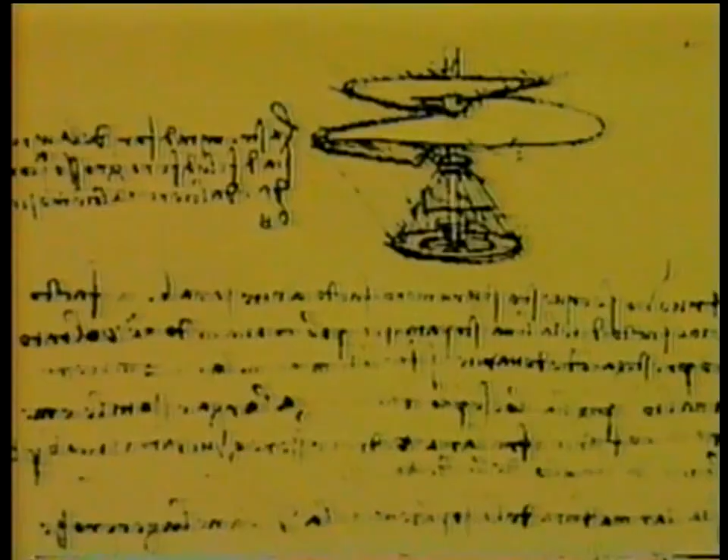In the 15th century, in his now famous drawing of the lifting air screw, Leonardo da Vinci wrote, 'I find that if this instrument with a screw be well made and be turned swiftly, the said screw will make it spiral in the air and it will raise high.' This was the world's first proposal for a full-size rotary wing device.

In the following centuries, several model helicopters were built and flown, but none to any degree of real success. But in 1784, flying mechanical models made by the Frenchman Launoy proved rotary wing flight was possible.

In the late 1800s, on the other side of the aviation fence were the fixed-wing pioneers, who were also having their share of trials and tribulations. It seemed like everyone shared the same degree of success in their early attempts to free themselves from gravity.

But man, in his steadfast persistence, finally did manage to get his fixed-wing machines off the ground. The helicopter pioneers, on the other hand, had a very, very long way to go.

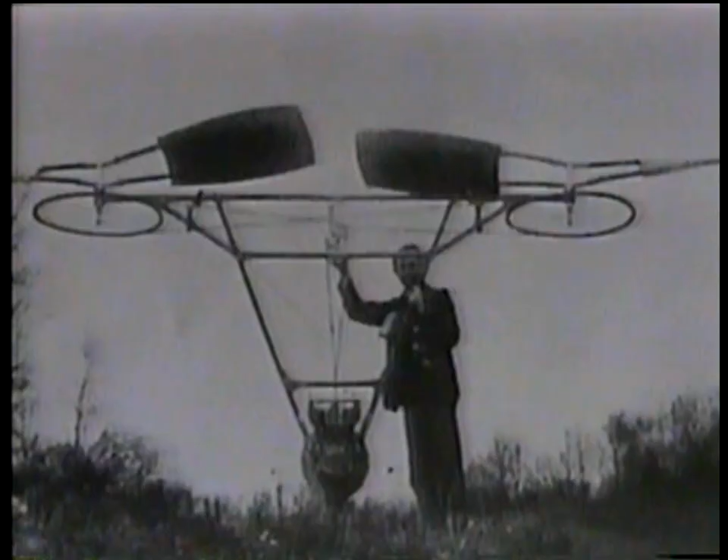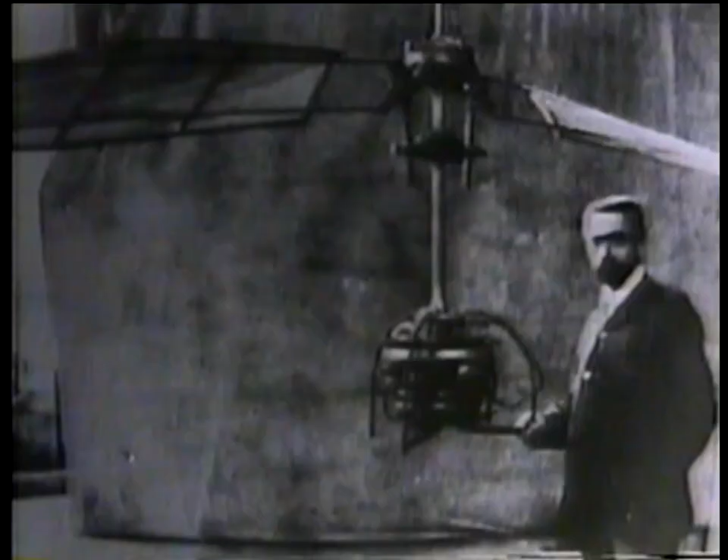As the 20th century began, technology had progressed far enough to supply the inventors with power plants capable of producing some lift. Unfortunately, though, not enough to lift the weight of their machines. It seemed the only thing holding back the development of the helicopter was the lack of a suitable engine.

But when suitable engines had been produced, these aviators soon realized that an engine was only one of a multitude of problems they would have to overcome. In the decades to follow, each one of these problems had to be identified and resolved by countless engineers throughout the world.

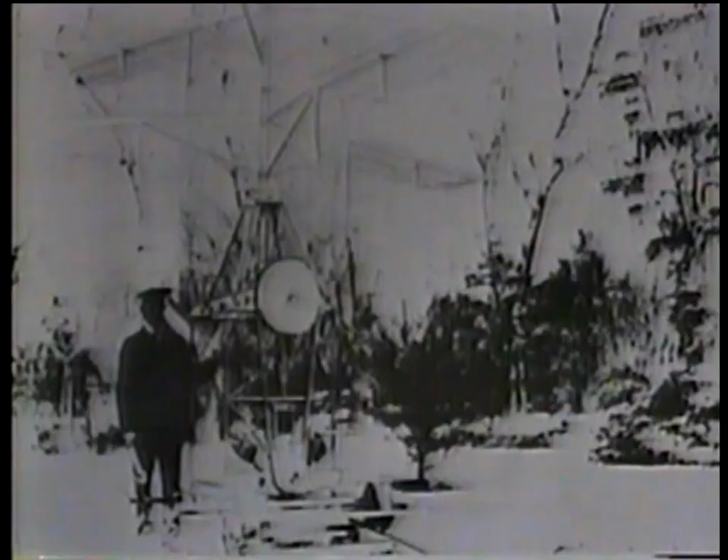In 1907, the history of the helicopter really began with the first free flight of Cornu's helicopter. Igor Sikorsky followed, along with numerous others, most managing to get off the ground with little or no control once they were airborne.

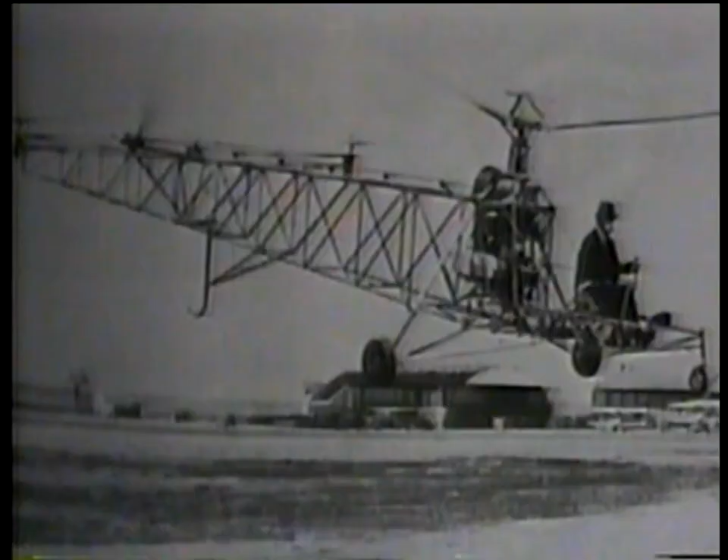The year 1940 saw Igor Sikorsky make great strides in controllable direct lift flight. In that year, he set a world endurance record of 1 hour and 32 minutes.

In the United States, World War II brought intense government interest in the helicopter. Government funding and military contracts followed. This was the real birth of the helicopter industry in the United States.

By the end of World War II, with a complete shutdown on helicopter research in the USSR, Great Britain, and France, and with the annihilation of German industry, the United States found itself the leader in helicopter research and production.

The 1950s brought the Korean War and a new role for the helicopter, providing medical transport to MASH units. By the late 50s, a powerful new breed of

helicopters was born that sparked a revolution. Jet engines weighing one-half that of their piston-powered forerunners produced even more horsepower and were small enough to mount on top of the helicopter, making for a roomier cabin.

The 60s and 70s saw the most dramatic improvements in safety, dependability, and efficiency. Proven in the Vietnam War, the quality of the helicopter rose to astounding heights. Unfortunately, so did the cost of these machines, not to mention the cost of maintaining them.

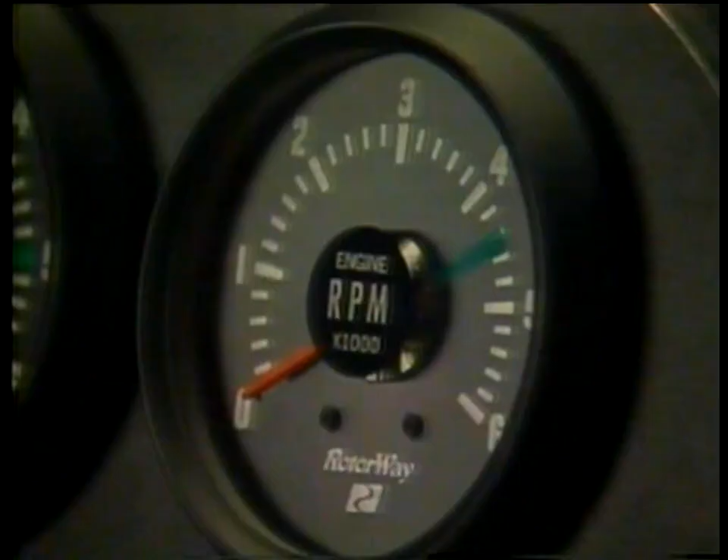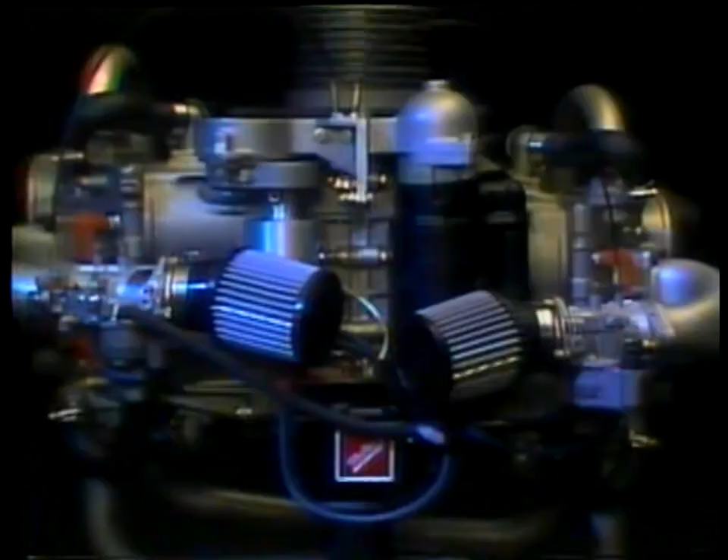The RotorWay Exec, the only helicopter designed and conceived for the private individual as personal transportation. It seats two, cruises at 95 miles per hour with a maximum airspeed of 115, and has a range of 200 miles. Its power plant, the RW152, is water-cooled, 4-stroke, 4-cylinder, 152 horsepower, produced entirely by RotorWay. With asymmetrical airfoil rotor blades and state-of-the-art elastomeric rotor hub technology, it's a ship that rivals any in its class at a fraction of the cost. It's something you've got to experience for yourself.

Sure, it's pretty, but how well does it fly?

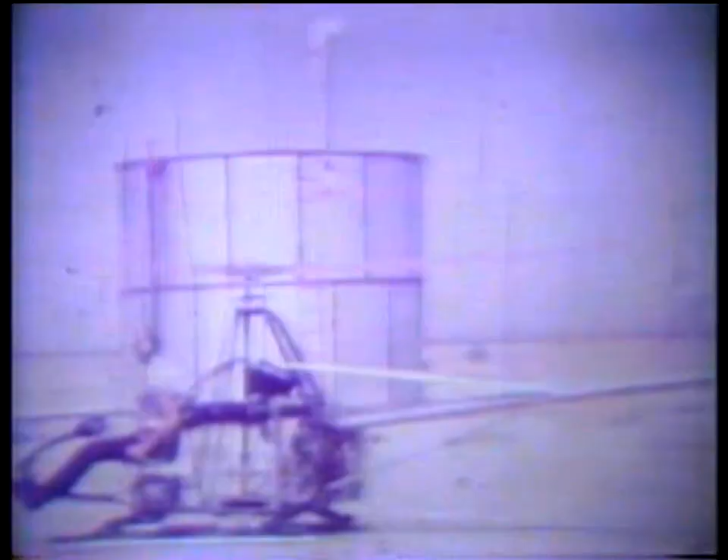But it wasn't easy. The evolutionary path to the present-day Exec was a very hard and long journey. In the beginning, 7 different prototypes were tested, but only 3 ever saw production. During the first 10 years of development, not one piece of hardware was sold. Finally, in 1967, the first magazine ads appeared announcing the availability of the Javelin, a one-man helicopter that could be assembled in a reasonable length of time by a home builder.

To make a long story short, RotorWay never stopped growing or improving its designs, from the Javelin to the Scorpion, powered by a 2-cycle, 4-cylinder, inline Mercury outboard engine. The Scorpion Too, RotorWay's first 2-seat helicopter, utilizing a 125-horsepower Evinrude V4 for its power plant.

The Scorpion 133. From the beginning, 10 different power plants were tested in RotorWay prototypes. Then, in 1975, RotorWay began production of its own power plant, the first generation of the RW133.

And finally, on to the Exec, RotorWay's latest offering. The Exec isn't just a new face and an old design. It's powered by yet another engine development, the 5th generation of improvements, the RW152. Increased from 133 to 152 cubic inches, along with improvements on cranks, rods, cases, cylinder heads, water jackets, and pistons, just to name a few. There's a new ignition system and rotor system, and most obvious, a clean corporate aerodynamic design.

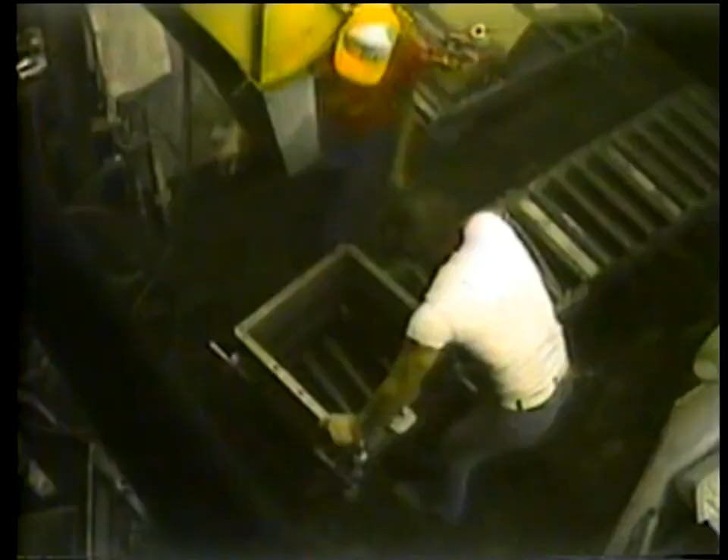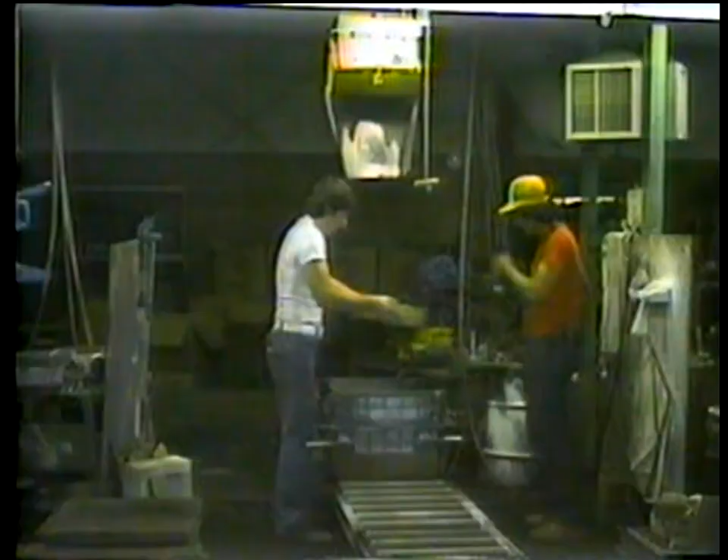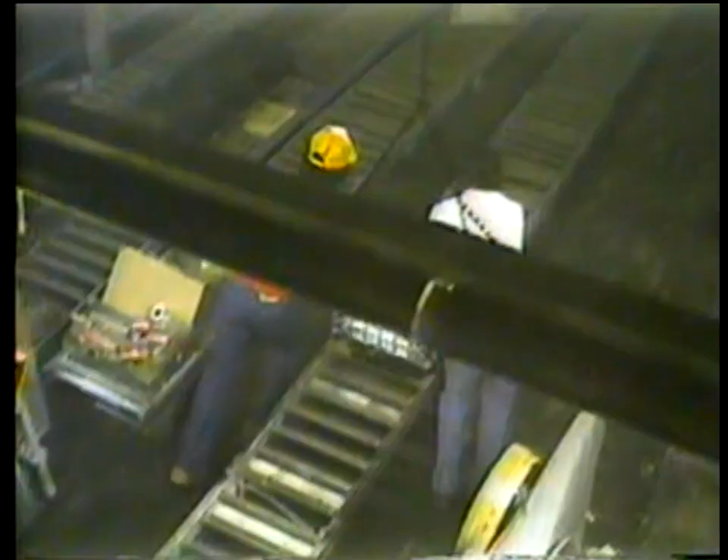Here we see a crankcase for the RW152, the Exec's power plant, being made. First, the pattern is filled with sand from the overhead hopper. It's rammed tight against the mold, then separated from the mold with a pneumatic vibrator. Now the mold is ready to be poured off. Aluminum is melted down in the electric induction furnace. When the metal, in this case aluminum, has reached 1100 degrees, it's ready to be poured into the mold.

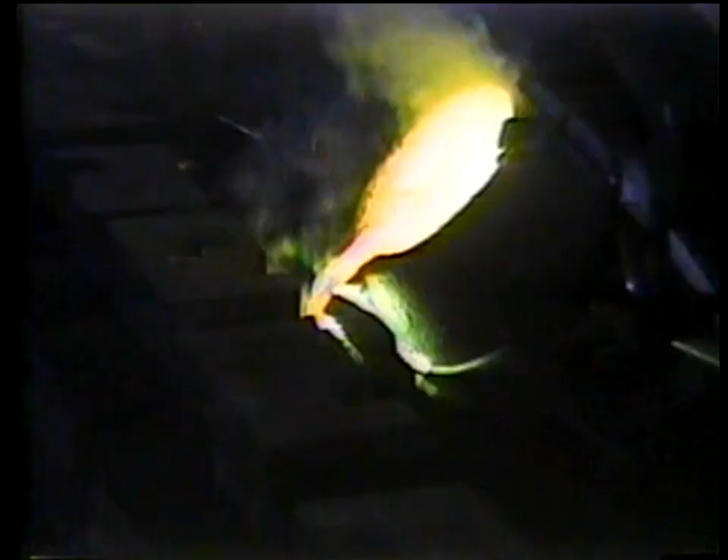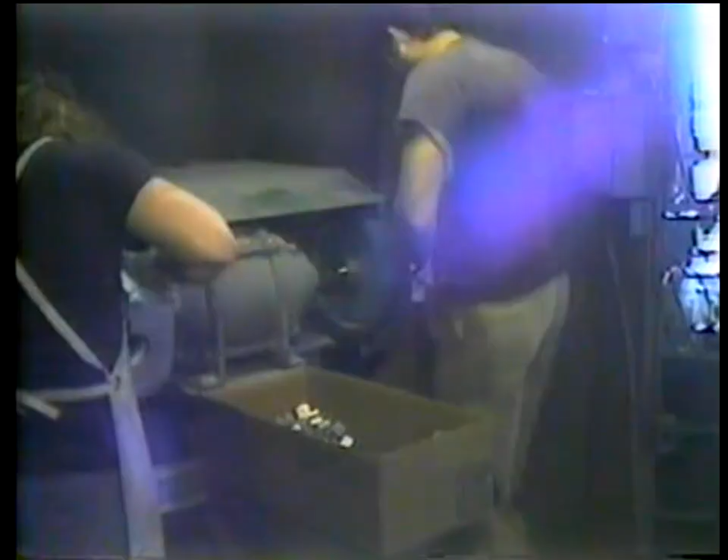Once the mold and metal have cooled, it's shaken out. Gates and risers are cut off, and then the castings are hand-tooled on belt sanders or hand grinders to achieve the final detail necessary.

The rest of the shops you'll see in RotorWay's complex handle only RotorWay's parts alone. The next step on our tour is the machine shop. This is where most of the parts for the RW152 power plant and most other helicopter components are manufactured.

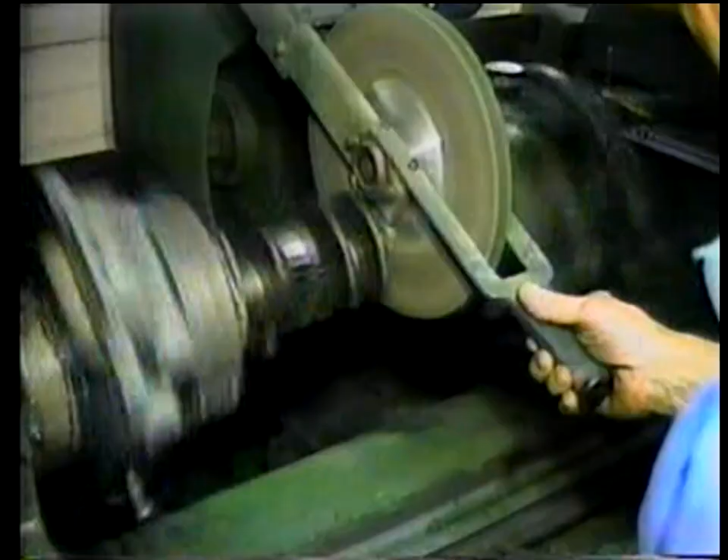Here in the grinding area, work is performed on the crankshafts. There are a total of 6 grinders in this area, and these machines can hold tolerances into millionths of an inch.

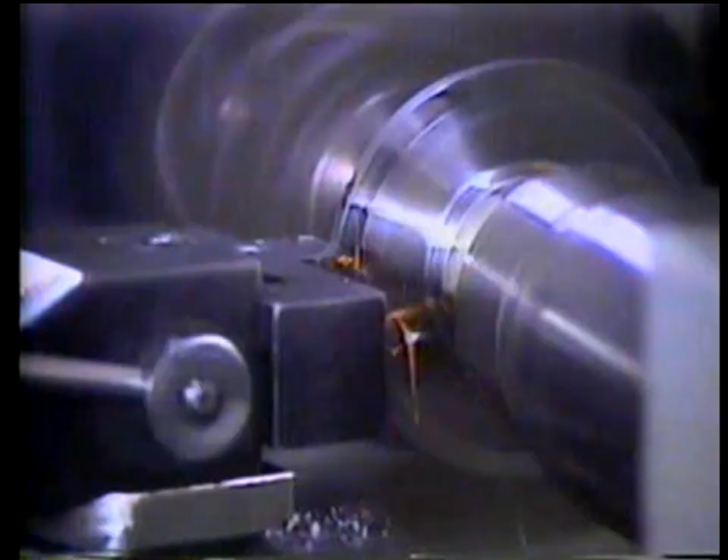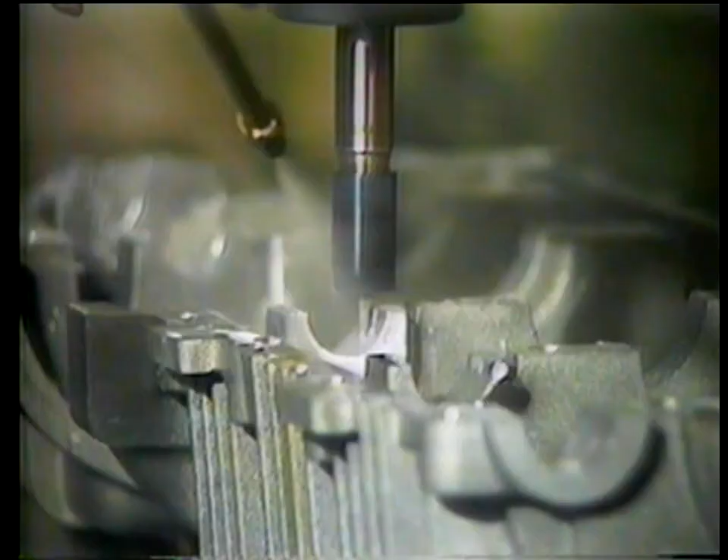In the secondary machining area are lathes, mills, honing, and line boring machines. Here, oil passages are drilled into crankshafts and machining is done on the main rotor hub plates along with several other operations.

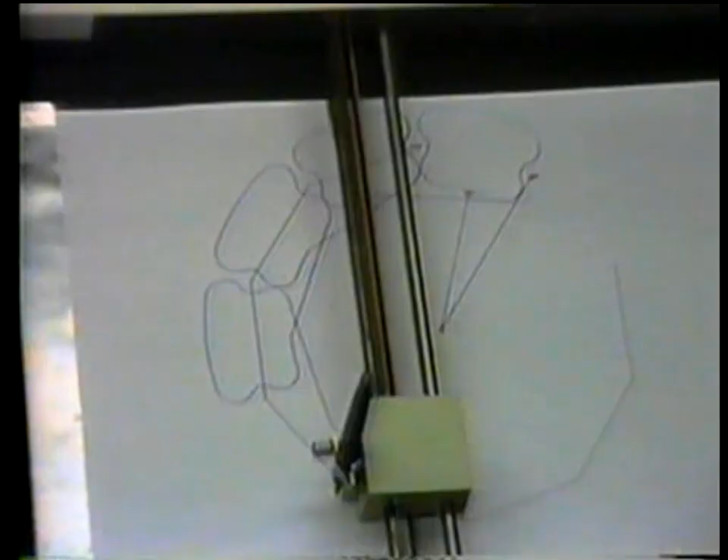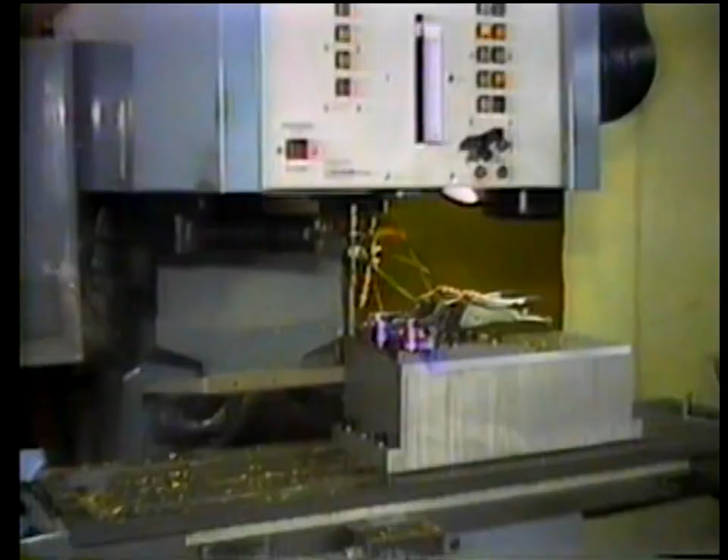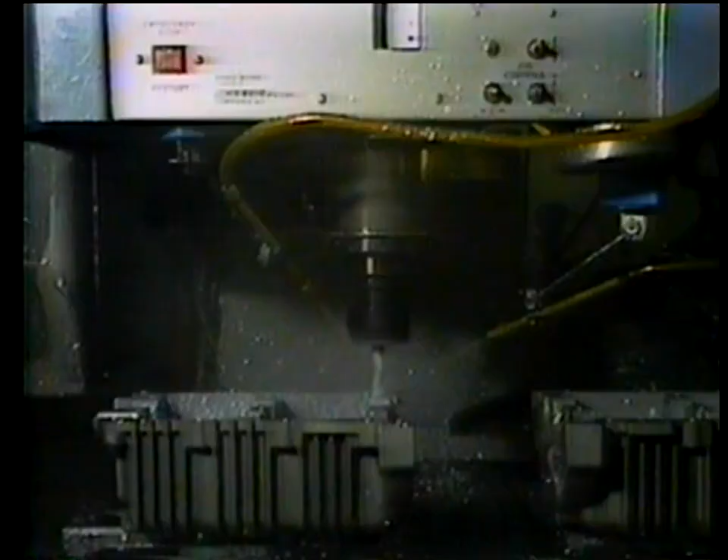The tool path programming for both the tape lathes and mill is done by an operator at a separate computer-assisted design terminal that you see here.

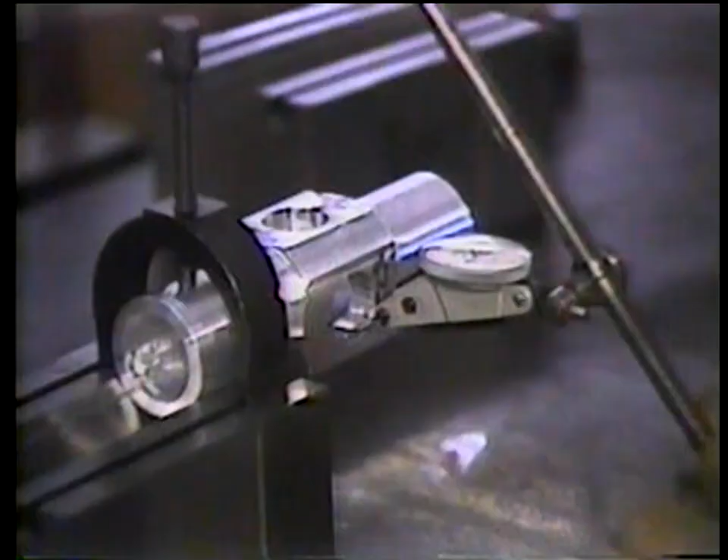Quality control is the single most important role with any aerospace manufacturer. In the 18 years RotorWay has been producing aircraft, the philosophy has been to produce a quality product. The key to RotorWay's success lies in the quality control exercised throughout the product's fabrication. Employing some of the most recent inspection equipment on the market, the inspection area checks each and every part manufactured on the latest state-of-the-art 3-axis computer-controlled measuring equipment.

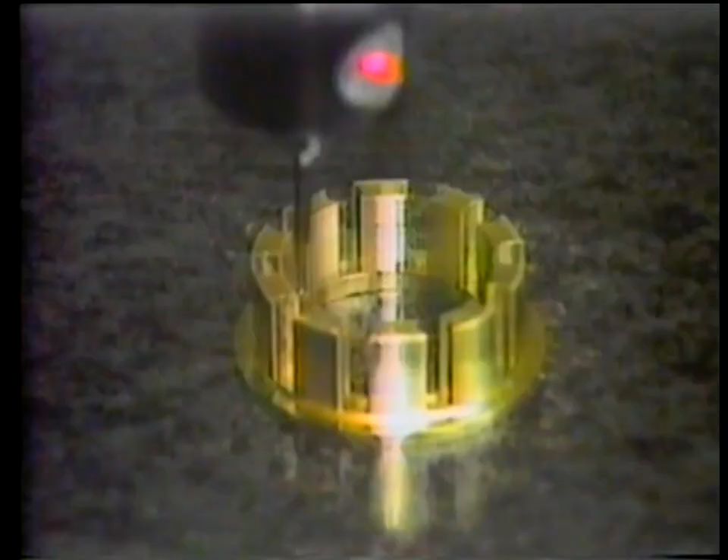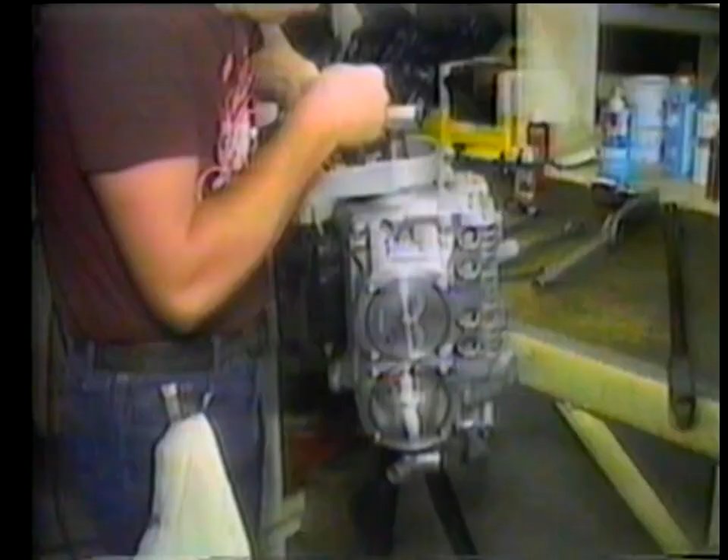The engine shop is where the RW152 power plants are assembled by hand. The castings and parts assembled here were poured at the foundry, machined in the machine shop, and have passed through dozens of quality control tests. Now let's take a very fast look at the Exec's power plant, the RW152, being assembled.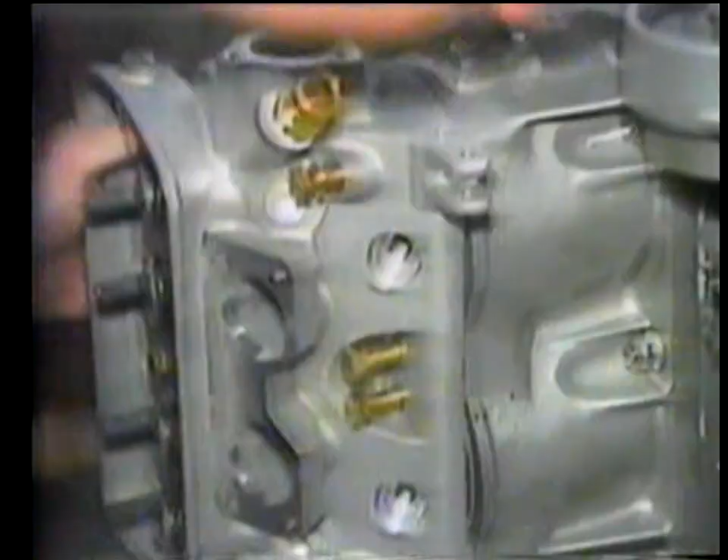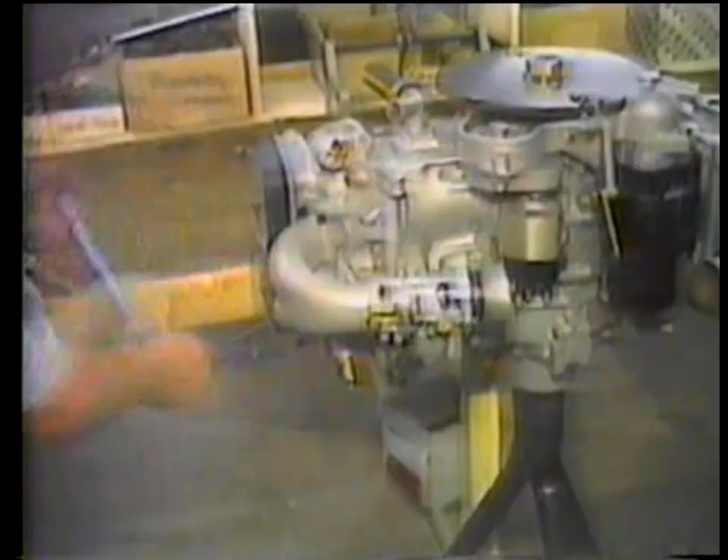If you can work this fast, there'll always be a place for you here at RotorWay.

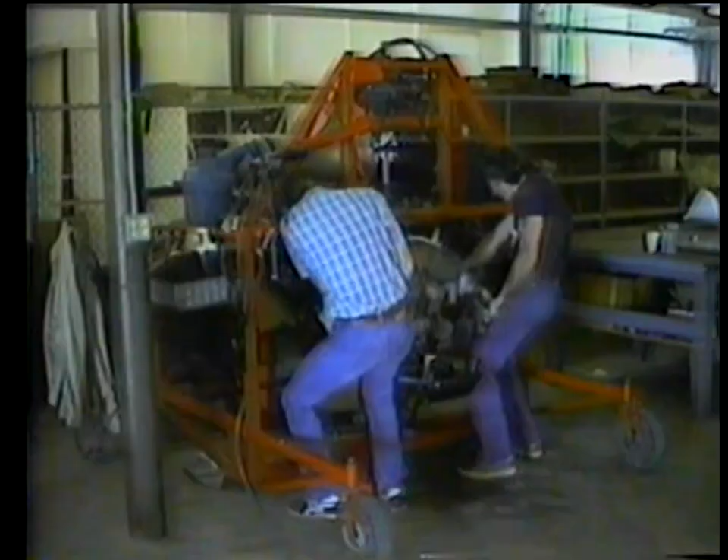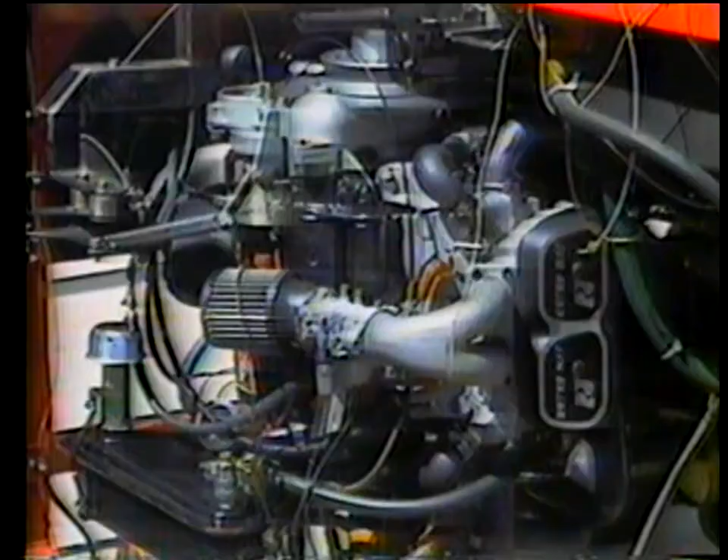After final assembly is completed on the RW152, an operational test is performed on every engine. This test involves using a specially designed dyno test cell, which can simulate actual load conditions which will be experienced by the engine during normal operation when placed in the Exec helicopter.

Once placed in the dyno test cell, the engine is started and run up for the first time. Close attention is directed toward achieving proper engine torque, horsepower, and temperature stabilization. RotorWay also adjusts the carburetors, sets the timing, and calibrates the fuel flow.

When you receive your engine, you and RotorWay know it meets all specifications. By going the extra mile required to put out an engine that has been tested and blueprinted, RotorWay is able to ensure high quality and reliability of operation.

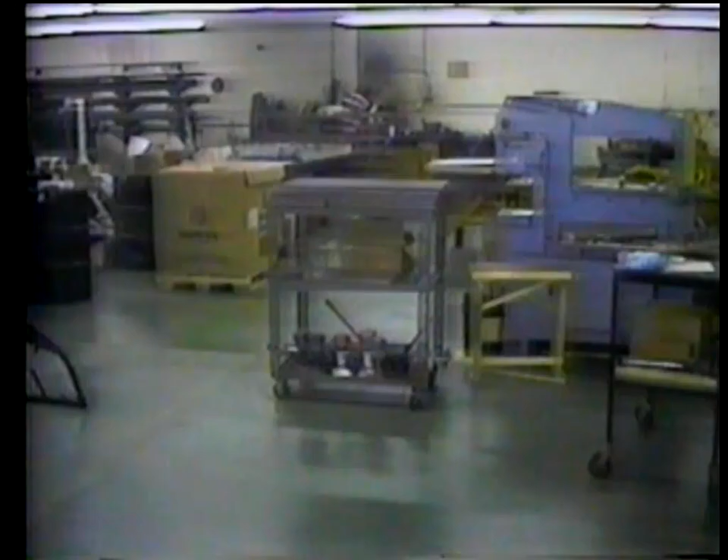The next area we'll look into is the steel fabrication shop. This is where the airframes for the RotorWay helicopters are made. There are a number of operations being performed here, including the cutting, coping, bending, and scribing of the airframe tubing prior to being placed into the airframe jigs for welding.

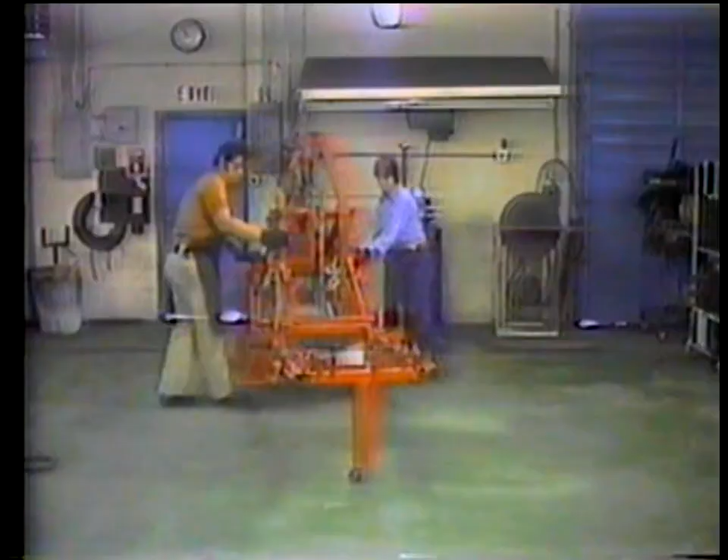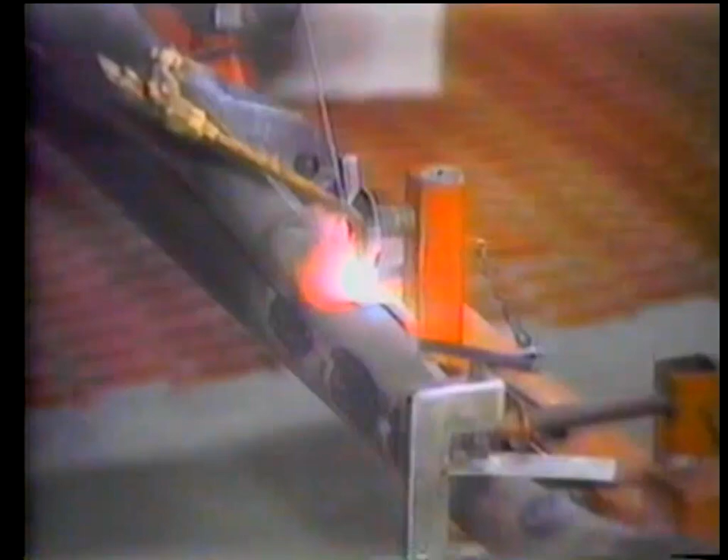A jig is used to ensure precise alignment of tubing on all airframes prior to welding. RotorWay uses only the finest grade 4130 chromoly steel for its airframes, chosen for its high strength, low weight characteristics. An oxygen acetylene torch with filler rod is used to weld the tubing together.

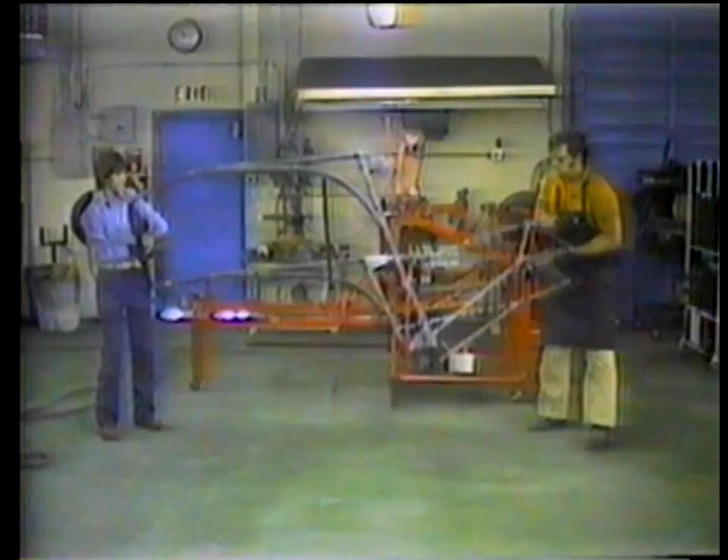You can now begin to see the Exec's roll cage design, which adds a great degree of structural integrity to the ship. After each piece of tubing has been tacked or welded into place, the alignment is double-checked, and then the frame is ready for shipment.

The next area we'll look at is the fiberglass shop. RotorWay's fiberglass shop, just like all the other shops, is totally self-contained. RotorWay starts by building its own plugs and molds for the parts that are being made. The fiberglass process starts with spraying gel coat into the wax surface of the mold.

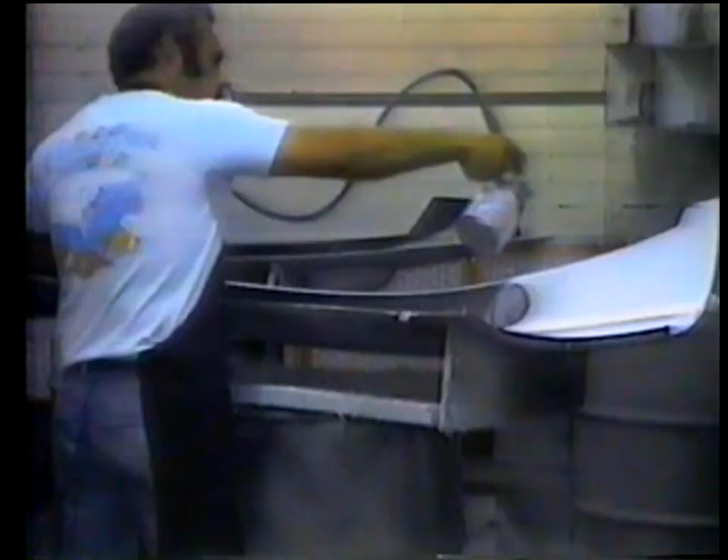The hand layup process is used exclusively for RotorWay products since they must be as light and as strong as possible for aircraft application. First, a layer of mat and cloth is pre-cut to a special pre-sized template, then saturated with resin. The saturated mat is then laid directly into the mold.

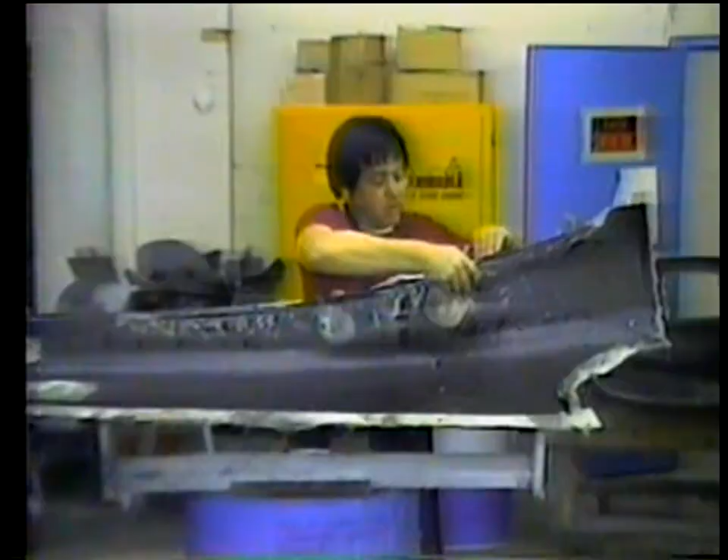RotorWay utilizes the squeegee method, whereas the mat and cloth are squeegeed out by hand. Using the squeegee process removes the maximum amount of resin from the parts, making it as light as possible, yet assures the saturation of the material, ensuring maximum strength. The part is trimmed and, after curing, is then removed from the mold.

The RotorWay Exec is certificated by the Federal Aviation Administration under the amateur-built category as experimental. This means the ship is assembled by you, the owner. The builder applies for his own airworthiness certificate upon completion of his aircraft. This is a very simple, straightforward process.

If you're not familiar with custom or amateur-built aircraft, at first glance you may be tempted to dismiss the idea of building your own helicopter. Don't be in a rush to reject this unique approach. There are several reasons why this approach to aircraft ownership makes good common sense.

If we were to sell this helicopter assembled, it would cost between $80,000 and $90,000 - well over 3 times what RotorWay presently sells it for in kit form. It'll take approximately 1 year part-time, evenings and some weekends, to build. But you'll be saving yourself around $60,000 by doing it yourself. How many people have a $60,000 a year part-time job?

If you build it yourself, you are allowed to do the maintenance, saving you even more money. Certified A&P mechanics cost $35 to $40 an hour. If you own a factory-assembled aircraft, you'll have to pay a mechanic to inspect and work on it for you.

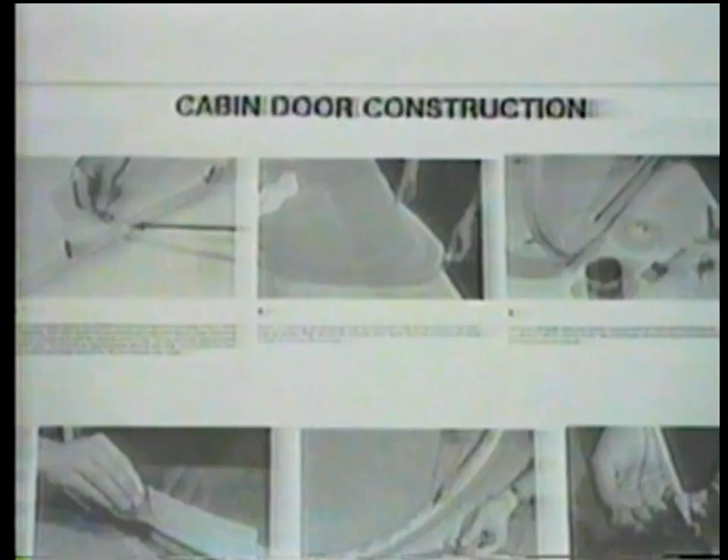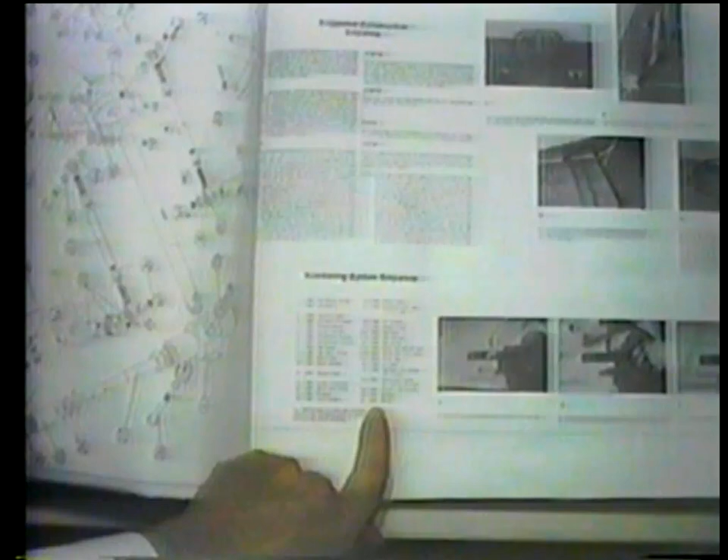RotorWay has left no stone unturned in its efforts to assist its builders. The RotorWay construction plans are some of the most well laid out plans in the home-built market. They include a series of 500 see-do pictures. Each photo has a caption below which gives instructions concerning the activity to be performed in that particular photo. In addition, if any dimensions are needed, you're referred to a zone on a print which will give those dimensions.

In addition to the detailed construction plans, RotorWay also has a customer service department. If you have a question during the building process, you can call the factory and talk to one of our customer service representatives.

RotorWay also has an extensive network of agents and builder clubs that can help you with questions and provide helpful hints and building techniques that will save you hours of building time.

RotorWay assembles a lot of the more difficult components, such as the engine, secondary drive, tail rotor assembly, and elastomeric rotor hub. In short, a great deal of the more complicated components are already completed for you.

Now let's take a quick look at a ship being final assembled. What you'll be seeing is final assembly. There is additional prefabrication work that must be done prior to final assembling your helicopter.

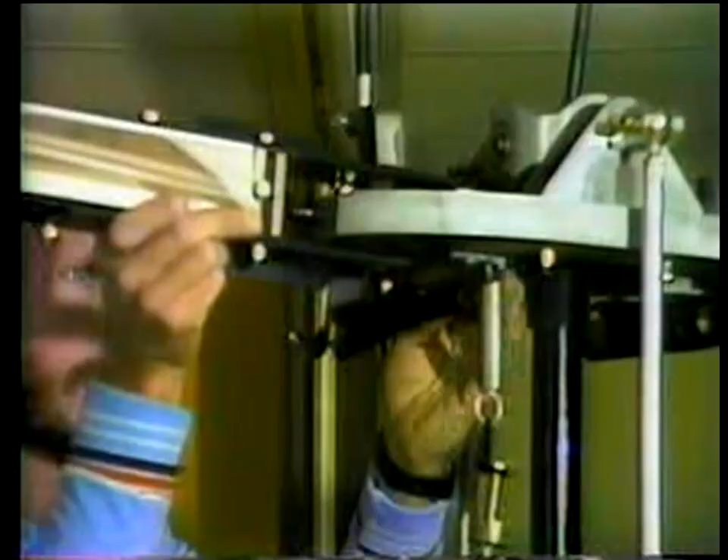When your ship is completed, you still won't be quite ready to fly. There will be a lot of pre-flight checks, rigging, and adjustments to make on the rotor system and flight controls. After these final adjustments are made, you'll be ready to run up your helicopter for the first time. And that day will finally arrive when you're ready to climb out in your helicopter. Once your ship is completed, you'll return to the RotorWay Sky Center for your flight training.

After your orientation meeting, you'll begin a concentrated week of instruction. You'll learn helicopter aerodynamics, theory, maintenance, rigging, and begin basic hovering techniques.

Flying a helicopter isn't as easy as it looks. It takes a lot of practice just to do the simple maneuvers you'll see here. To give you a basic understanding of how a helicopter flies, we'll have one of the Sky Center personnel explain the controls, how they work, and what effect they have on the ship in flight.

There are four basic controls in the helicopter: the cyclic, the collective, the throttle, and the anti-torque pedals. The cyclic controls the tilt of the main rotor disc. As you increase cyclic forward, you tilt the disc forward. As you bring cyclic aft or rearwards, you tilt the disc to the aft. When you tilt the disc to the left, you apply left cyclic. To tilt the disc to the right, you apply right cyclic.

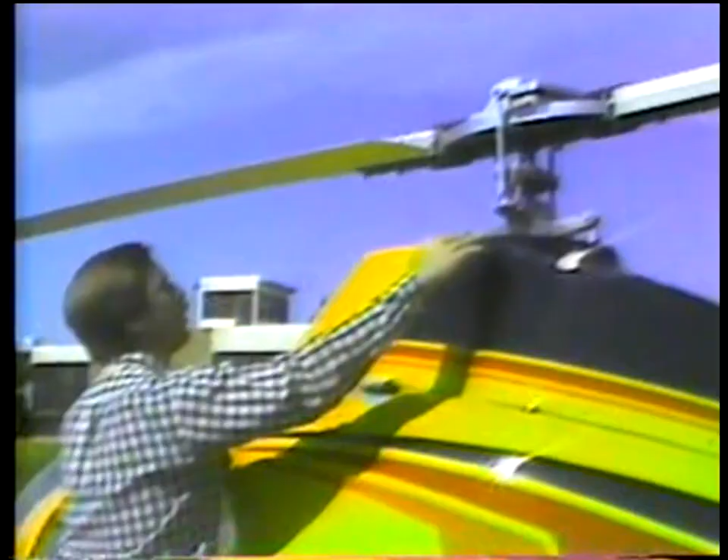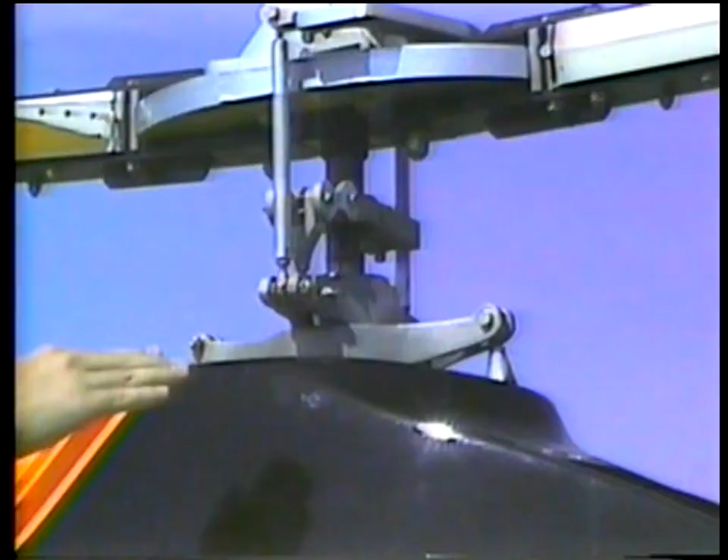Let's take a moment and look at the flight controls on our rotor system. Forward cyclic tilts the swash plate forward. Aft cyclic tilts the swash plate to the aft. Lateral to the left and lateral to the right. Now we come back to a centered cyclic.

Our next control is the collective. The collective controls the pitch in the main rotor blade and is used to increase or decrease the amount of thrust coming out of the main rotor system. As we increase collective, we increase the pitch in the blades. As we decrease collective, we decrease the pitch in the blades.

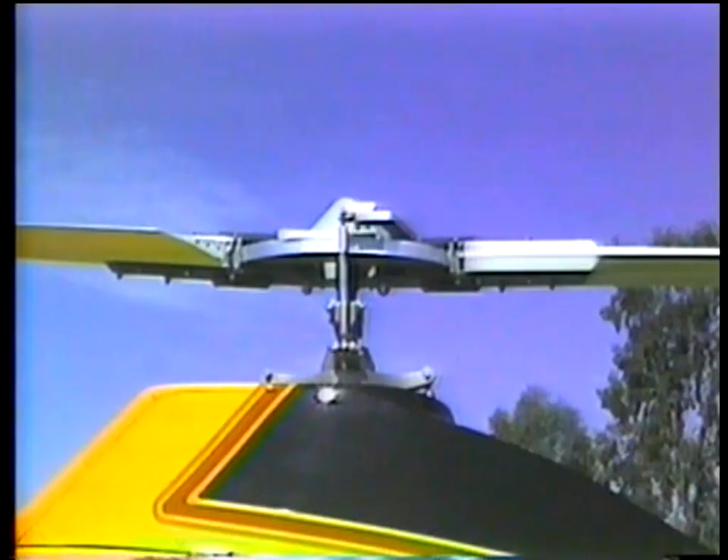Let's now look at how the collective functions on the main rotor hub. As we increase pitch, the swash plate moves up, increasing pitch in the blades. As we decrease pitch, the swash plate moves down, decreasing the pitch in the main rotor blades.

Our next control is the throttle, which is located on the end of the collective. It is normally operated with the left hand, and to increase throttle, you simply roll the throttle on. To decrease throttle, you roll the throttle off. Throttle is required when you increase and decrease the collective pitch in the main rotor system. The throttle controls are connected to the carburetor and increase and decrease the throttle opening on the carburetor.

Our last control is the anti-torque or tail rotor control pedals. These pedals are used to control the heading of the aircraft and to resist the torque that's put into the main rotor system from the engine. As you increase right pedal on our aircraft, we increase the pitch in the tail rotor blades. As we decrease the right pedal or increase the left pedal, we decrease the pitch to neutral and then actually add pitch in the other direction.

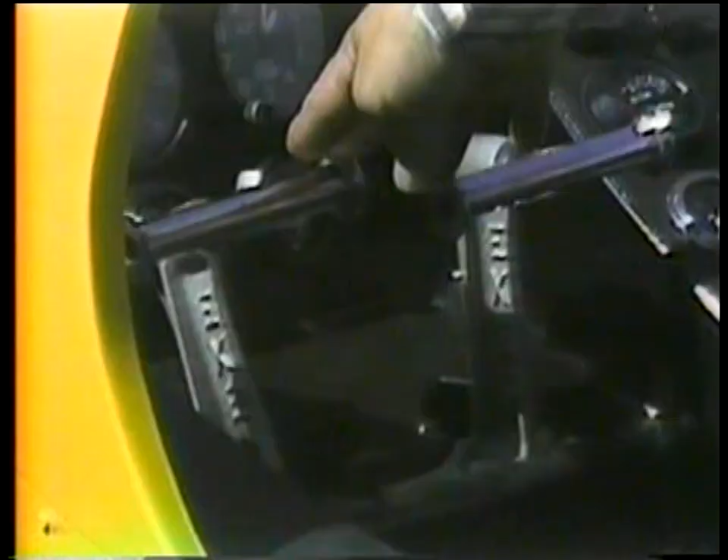As we bring the pedals back to the neutral position, let's look at the tail rotor and see the reaction there. Starting with a neutral pedal, we will increase pitch in the tail rotor blades with full right pedal. At full right pedal, now we come back in with full left pedal, and you can actually see the reverse angle on the blades. Now we'll come back again to our neutral position.

Now, as I move the helicopter controls, we'll have a demonstration of their effect on a flying helicopter. Let's watch a helicopter in flight as I move the controls in the same relationship in this split-screen demonstration.

As we come to the point where we're ready to lift off, we begin by increasing collective until we come up into a hover, and we find that we're in a stabilized hover. Now forward cyclic to move from one pad to the other. Forward cyclic is reduced a little bit to neutral, and then aft to stop the movement. Now we come aft some more to actually back up from one pad to the other. Neutral, slight forward cyclic to stop the motion, and come back again to a neutral cyclic and a stable hover.

Now we perform a left hovering turn by increasing pedal to the left. Now right cyclic and right pedal so that we hover sideways to the right, back to a neutral position with both controls, stable hover, and now left cyclic and left pedal for flight to the left. Coming across, we begin to neutralize our controls so that we slow down and come back into a stationary hover.

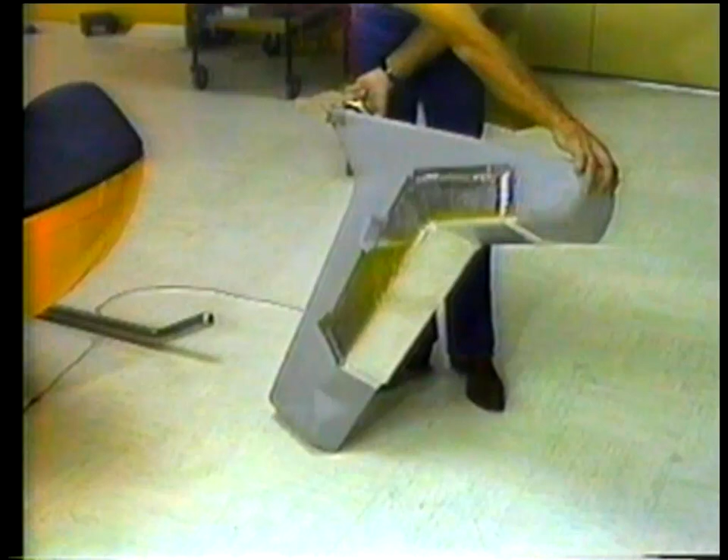The airframe employs a roll cage design that protects the passenger compartment. Then, in order to reduce the risk of post-crash fire, the Exec uses a special high-impact resistant fuel tank material produced by Phillips Petroleum.

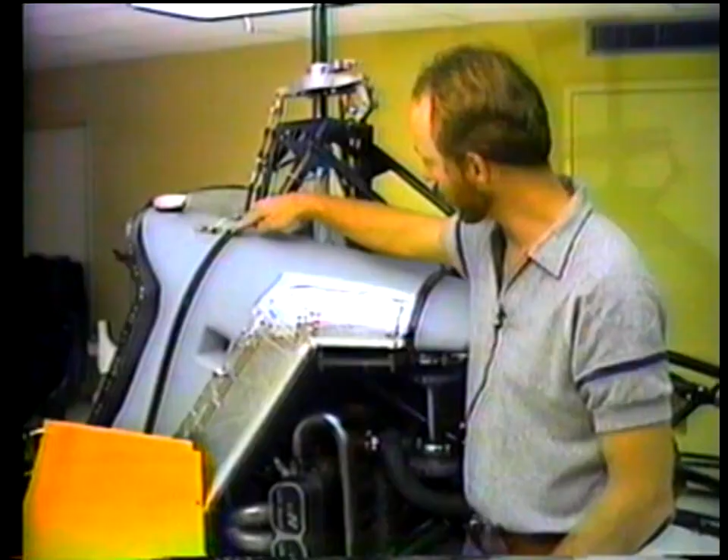These tanks are rotationally molded from a cross-linked high-density polyethylene resin. It's far superior to metal for several reasons, but primarily because of impact strength.

Using the Exec's external sling, we'll demonstrate the strength of the fuel cell. First, we fill the tank with gasoline and then attach it to the sling. Now we'll take it to an altitude of 30 feet for the drop test.

As you can see, the fuel tank easily survives the impact. When you consider the fact that post-crash fire danger is a major cause of fatalities in aircraft accidents, having a fuel tank that resists punctures and impact breakage better than metal is a major safety feature.

One of the most commonly asked questions concerning helicopters is what happens when you're in flight and the engine quits. First of all, you need to realize that it's not the engine that's keeping the helicopter in the air, it's the rotor blades. If you're driving your car down the road at 55 miles per hour and the engine quits, you'll coast for a while, then come to a gradual stop.

The reason is because of the inertia the car has built up. The inertia of forward speed keeps the car moving. Now, the same thing happens with the helicopter's rotor blades. They will keep turning after the engine quits and get you safely to the ground while freewheeling. This maneuver is called auto-rotation.

They are only found on larger commercial ships. In the cross-section shown here, the top blade is of asymmetrical or unsymmetrical configuration. The bottom blade is symmetrical.

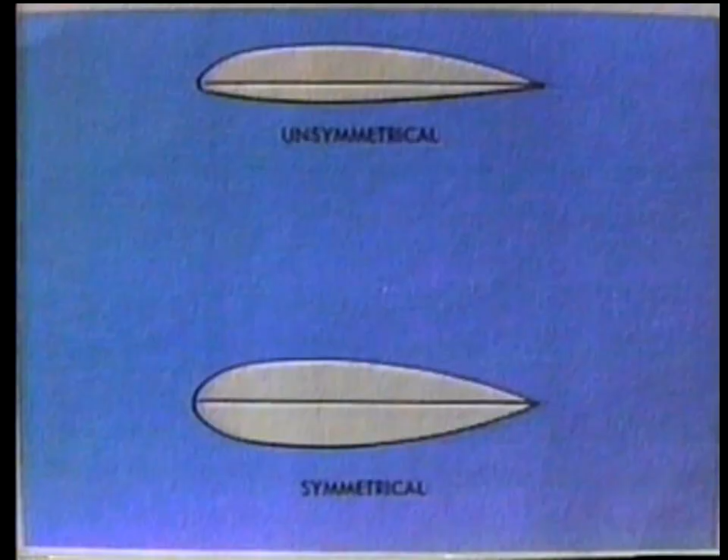The asymmetrical blade on top resembles an airplane wing, so in essence you have a rotating wing that creates lift at 0 degrees pitch. With the symmetrical blade, you create lift by increasing the angle of attack to relative wind. So you can see why the RotorWay asymmetrical blades create high lift more easily. This makes a drastic improvement in power-off auto rotation.

Igor Sikorsky, the father of the helicopter, dreamed that someday his unique machine would be man's servant of peace, a dependable workhorse and effective rescue vehicle. His dream has come true. The helicopter has a multitude of uses, and the Exec is no exception.

With the addition of the new RotorWay flotation system, the Exec can land practically anywhere. Water flying opens scores of new landing sites and offers pilots an exciting new way to use their helicopters. You can just imagine all the places you could be going, camping and fishing on secluded lakes and rivers, places where very few have ever been. Floats make the inaccessible accessible.

On the farm, the Exec is a proven workhorse. When equipped with the RotorWay ultra-low volume agricultural spray system, applying chemicals to a small or mid-sized operation becomes very cost-effective. A typical maximum load of chemical will cover 160 acres in 1 hour and 20 minutes. In minutes, the spray system can be easily removed to free the operator for other chores such as checking crop conditions and irrigation systems, and the list goes on and on.